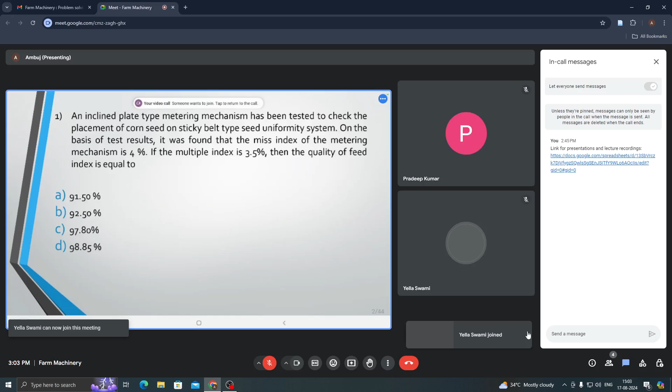Do try to solve this particular question. As you can see, miss index is given, multiple index is given. Now quality feed index is being asked here.

If you don't know the formula, I'll tell you. The quality feed index is equal to 100 minus, in bracket, metering miss index plus multiple index.

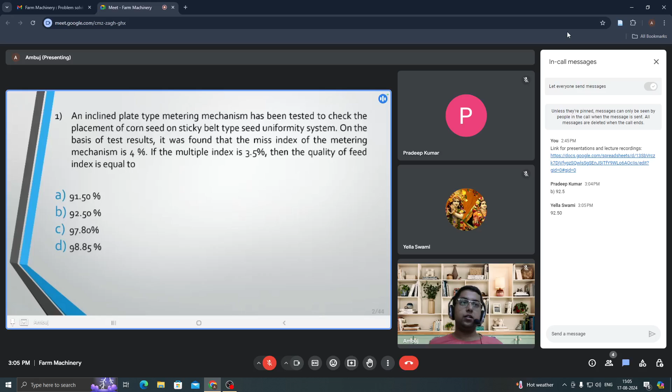Pradeep Kumar is saying 92.5. Great, okay, very good. Yella Swami, please you also try, I already told you the formula also. Try to solve this particular question, the formula is 100 minus, in bracket, miss index plus multiple index. Easy question, do try to solve, check what is the answer coming. Very good, both the students have just calculated. Very nice, the correct option is 92.5 only.

As you people have calculated, I'll brief you about the different indexes. First index is miss index. It is a measure of how often the seed metering mechanism fails to release a seed at a designated time or position. As the name suggests, it is miss index. Essentially, it indicates the percentage of planting instances where no seed is getting dropped from the metering mechanism, that is why the name has been given miss index.

Now how to interpret this miss index: lower the miss index, the more reliable the metering mechanism would be, because fewer gaps would be there in the seed placement. High miss index means high frequency of missing seeds, leading to uneven plant spacing. So this is the interpretation of the miss index.

Another index in this question was multiple index. As the name suggests, multiple index measures how often the seed metering mechanism releases more than one seed at the designated time or position. It represents the percentage of planting instances where multiple seeds are getting dropped in the same spot. That is our multiple index.

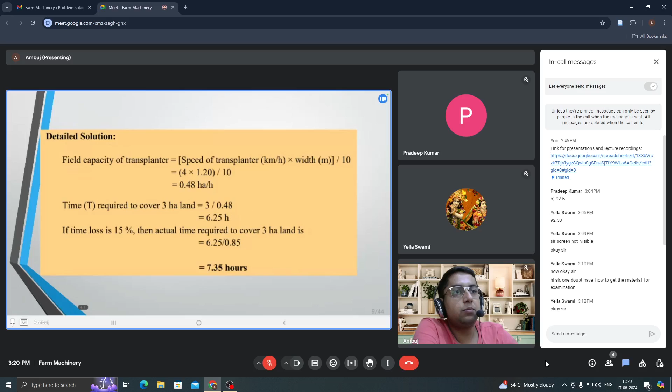Now the time loss is 15%. So either I divide by 1 minus the loss, that is 1 minus 0.15, which equals 0.85. Or another approach: I'll calculate effective field capacity as theoretical field capacity multiplied by 1 minus time loss. Either I multiply or divide by 0.85. Better you go with this approach, don't get confused between the two. From both you will get the same answer, but for the examination point of view, this approach is easier, which is why I've kept it here for you.

So calculating TFC, then calculating the time required to cover 3 hectare land with 15% time loss, divided by the efficiency, which is 1 minus the loss, that is 0.85, the answer would be 7.35. Is it clear?

Is it clear? Any doubts? Please do respond.

Sir, please repeat the solution once again. Okay, I'll just repeat.

In this question, an 8 row paddy transplanter is given. Speed is 4 km per hour, and the row to row spacing is given as 15 centimeters. So the formula for theoretical field capacity is S multiplied by W divided by 10.

So here, 4 multiplied by the total width, which is 8 into 15. S is in kilometers per hour, W is in meters, so here it would be the total width of the implement, that is 8 multiplied by 15, since 8 rows are there and 15 is the row to row spacing. Total it would be 8 into 15, which is 1.2 meters.

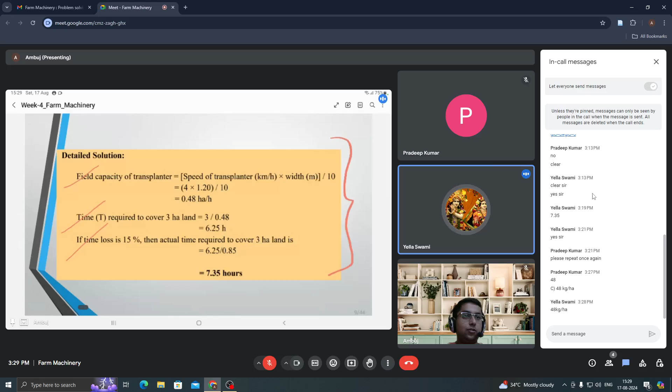Okay, I am sorry I was not able to see your comments. Very sorry, you both have answered the previous one, 48 kg per hectare. Very good, very good. Now I can see, my fault, I haven't seen your option. Yes, for previous question, Yella Swami says 7.35.

Very good, very nice. Pradeep has written, please repeat once again. Okay, I have repeated. Clear, sir. Very good, yes, both have answered 48 kg per hectare.

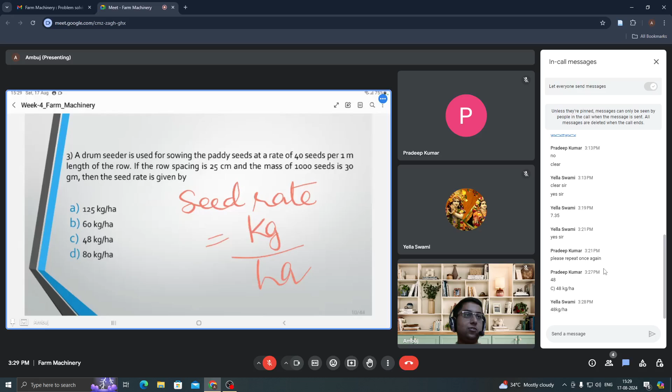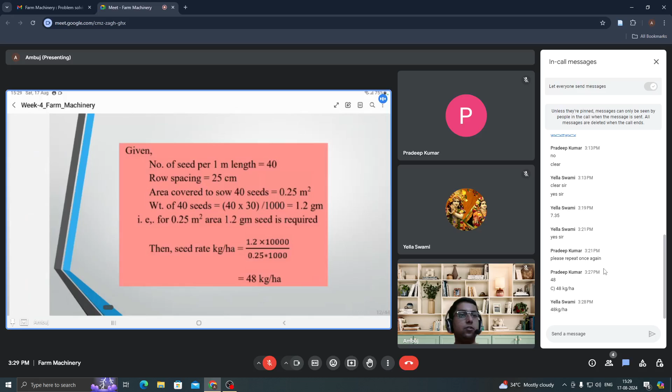No problem, yes, see here, the solution I have provided. Number of seeds per 1 meter length is 40.

Row spacing is 25 centimeters. Area covered to sow 40 seeds is 0.25 meter square.

What is the weight of 1000 seeds? Then from unitary method, I got the weight of 40 seeds, that is 1.2 gram. Very simple, 0.25 meter square area, 1.2 gram seed is required.

So what would be the seed rate? 1.2 divided by 1000, then 0.25 divided by 10,000, gives 48 kg per hectare. Both the students who have joined today have calculated it.

Very nice. I think you people are not having any doubts. I am assuming because both the people have answered. We'll move on forward.

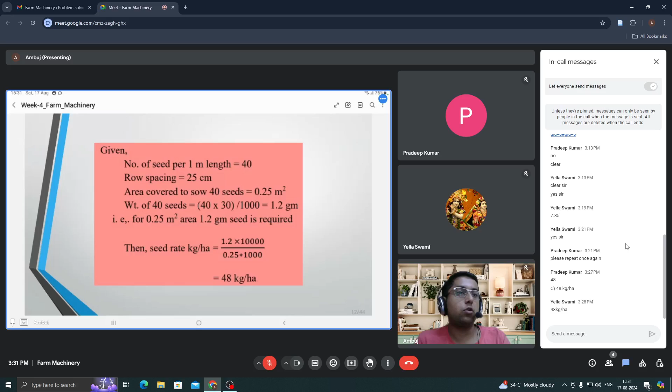This whole thing is given in the lectures. I can understand if you don't remember, please do just respond. There is no need to fear that you have to be correct in the very first attempt. Then I'll show the code to you also. Yes, try to respond.

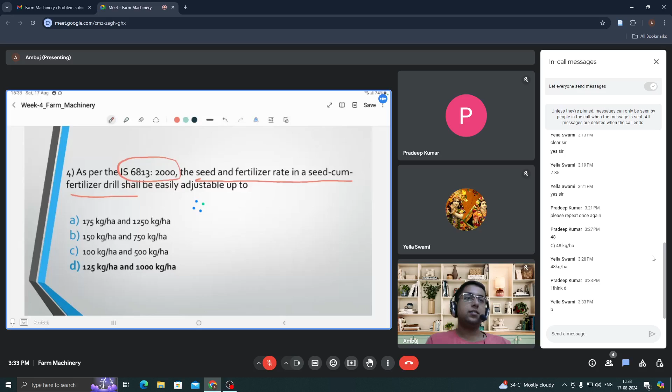IS 6813, 2000 deals with seed and fertilizer rate in a seed cum fertilizer drill. This particular code is related to the design of seed cum fertilizer drill only, yes this is the code.

Here I have shown the pictures, I'll zoom in, don't worry. After the class, in the PPT also it would be there. Please do see all the aspects which are there in this particular code. It is related to sowing equipment, seed cum fertilizer drill, and what are the specifications.

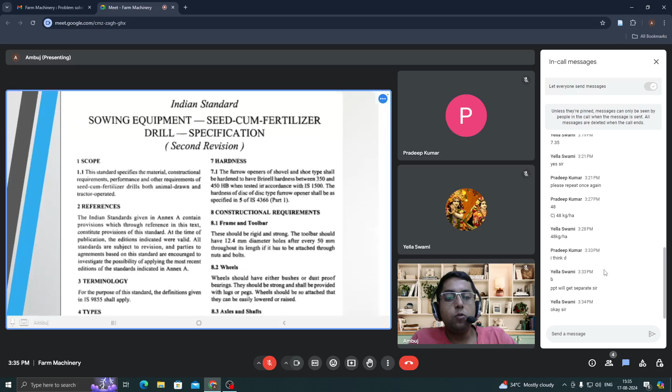Who will check whether the standards set by the government agencies are getting met or not? The testing agencies, various testing agencies are there. So for seed cum fertilizer drill, these specifications are there, let us see them. Scope is there, then references, Indian standards is there.

Then terminology they have given, what are different types: animal drawn, tractor operated, trail mounted. Then they have given the size also, what should be the size, how it should be mentioned. What are the different materials, for different parts what materials should be used.

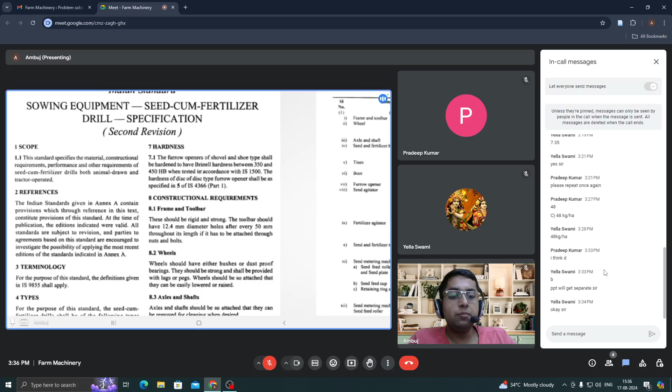It is not like the hopper can be made from plastic, it will wear out, so some standards are there that we have to follow. Hardness is there, what shall be the hardness, then frame and toolbar, how construction shall be made, then wheels, then axle shaft.

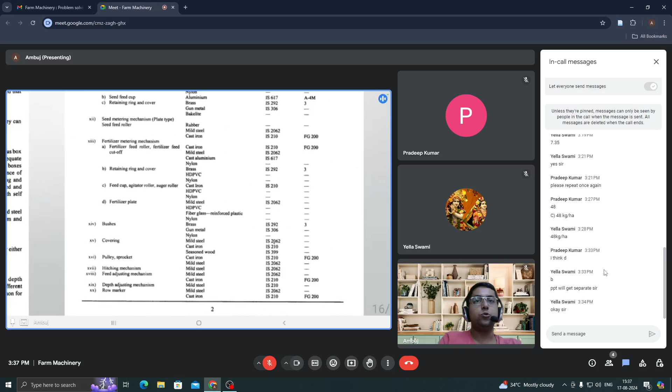Seed and fertilizer boxes, what should be the specifications? Whether I should go for mild steel or GI sheet depends on me. Tines are there - what should be their specification? For openers, this particular table mentions the materials for construction of different components. After the class, just have a look. Different materials for each component are provided, written here in code only. You have to go through that code. From there you'll get what shall be the material and what shall be the grade.

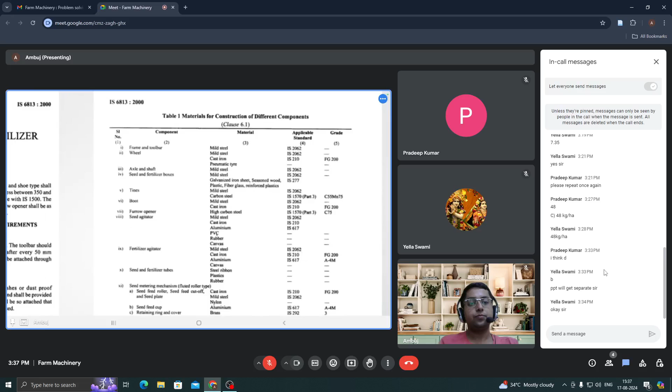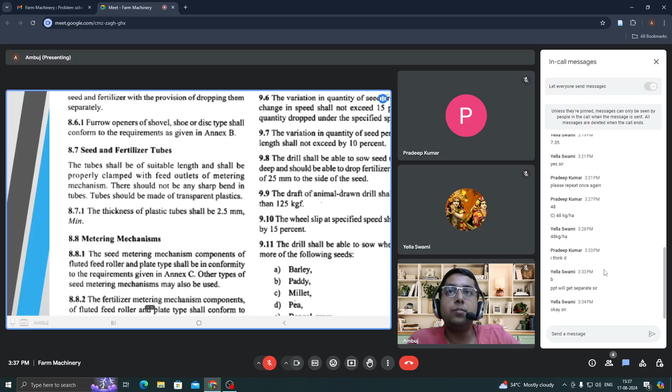Next, see here - furrow openers are there. Then seed and fertilizer tubes - what shall be the mechanism, what shall be the material, what shall be the specifications. Then metering mechanisms, then transmission system, then performance requirements. Seed and fertilizer rate shall be easily adjustable up to 125 kg and 1000 kg per hectare respectively - that was being asked in this particular question. So the entire code along with the detail I have mentioned here.

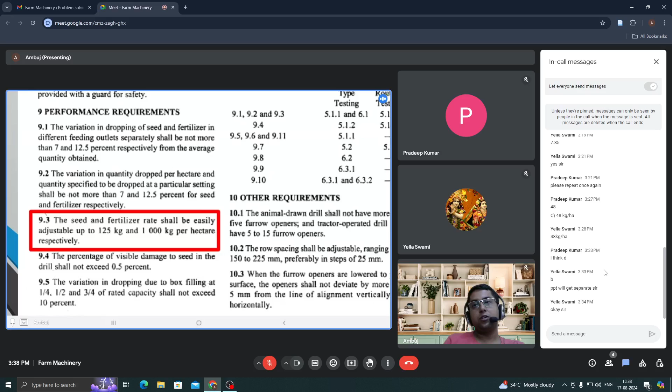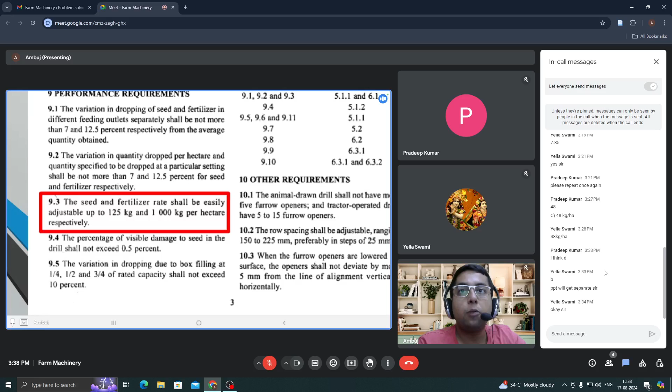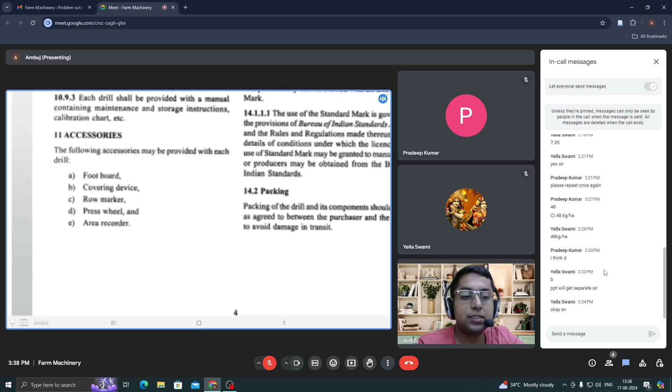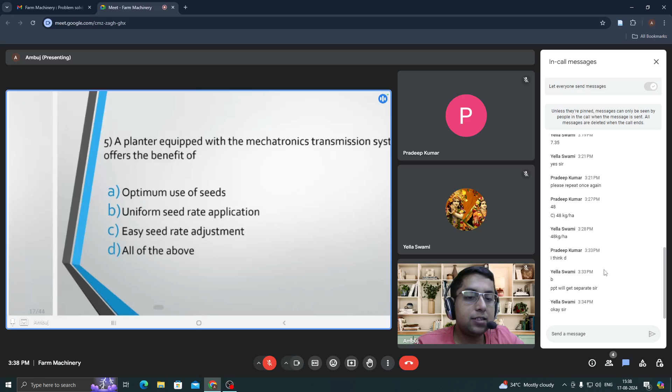Then percentage of visible seed damage - in the seed drill shall not exceed 0.5%. That's visible damage to the seed which I can see while my seed cum fertilizer drill is operating. Variation in dropping due to box filling shall not exceed 10% - that is being mentioned here. What shall be the weight, what shall be the material, what shall be the accessories - everything is mentioned here. Then workmanship and finish, then sampling and test, then marking and packing, then how to get that certification marking also - everything has been mentioned here. After the class, please revisit this entire code. I have mentioned it here - you'll get a lot more insights.

The correct option would be 125 kg per hectare to 1000 kg per hectare. Let me just save this for you.

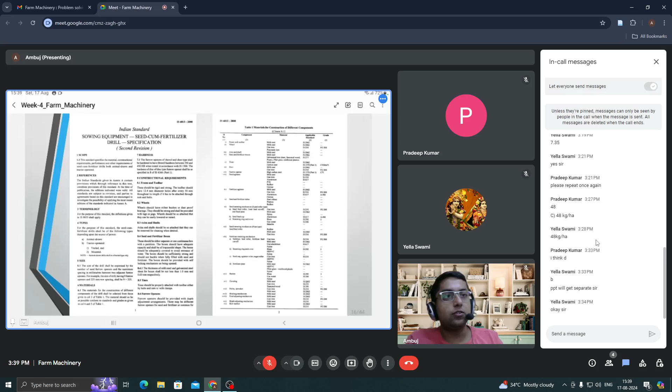Any doubts anywhere, anybody? Any doubts? Clear? Not clear? Shall I move forward, shall I stay? Yes, yes sir, yes. Okay, we shall move forward.

Clear? Good, very good. Now please try to solve this question. I know the first three numericals were quite tricky, but these type of questions you can very easily solve. You should always get 100 out of 100 in these questions, or 1 out of 1.

A planter equipped with a mechatronics system offers the benefit of optimum use of seeds, uniform seed rate application, easy seed rate adjustment, all of the above.

Pradeep is saying D. Very good. Yella Swami is also saying D, and you both are correct. I congratulate you for getting 1 out of 1 in this particular question. A planter equipped with a mechatronics system offers all these benefits: optimum use of seeds, uniform seed rate application, and easy seed rate adjustment.

Let us look at each of them one by one. Mechatronics system integrates mechatronics - I'll write it so your understanding becomes more fundamental. Mechatronics means mechanical plus electronics. The system would be having a mechanical component, an electronic component, as well as components of control engineering.

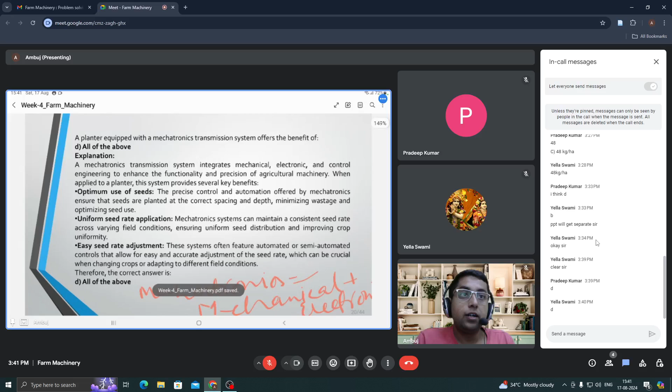This enhances the functionality and precision of agricultural machinery. I'll tell you this particular domain in great detail in the next few slides - just be with me, because this domain is getting important day by day. If you will be doing R&D research after graduation or post graduation, or going for higher studies, this domain is getting a lot of focus nowadays. So I'll tell you the components as well as how it is functioning in great detail. Be a bit more careful and attentive, and do ask me if you have any doubts.

This is very important for your future, whether you are getting into the agricultural machinery industry or pursuing higher studies - for both domains this concept is getting a lot of attention nowadays. So be with me, be attentive, just focus. All the components - mechanical, electronic, and control engineering - would be there in an agricultural machine.

And how will I get optimum use of seeds? Firstly, I'll get these particular benefits: the precise control and automation provided by the mechatronics component. Everything is getting automated. Here feedback is there, so the efficiency of the system is getting enhanced.

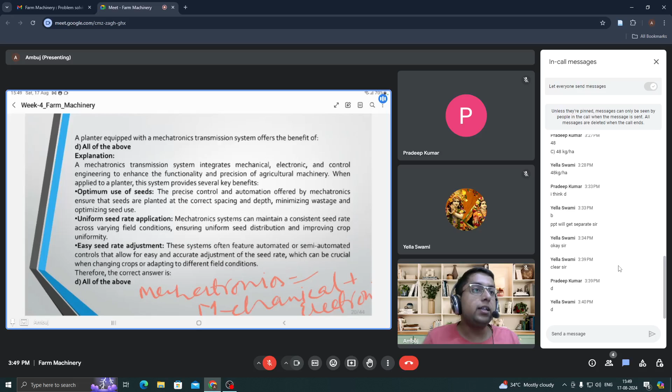In between, I'll just move forward. At the end of these slides, 2-3 slides later, I'll tell you the disadvantages also. If you can think of any, you can just comment. Yes, we shall move forward.

In this way only, you have to design a mechatronic system. First, you formulate what components are required. Then in the second phase, you try to model the velocities, the currents, the angular velocities which are happening, and how these components interact with each other in a closed loop. Important thing is everything should be closed loop. If it is not closed loop, then there is no particular benefit I can achieve by incorporating these sensors as well as these microcontrollers in my system. Everything should be in a closed loop, feedback should be there.

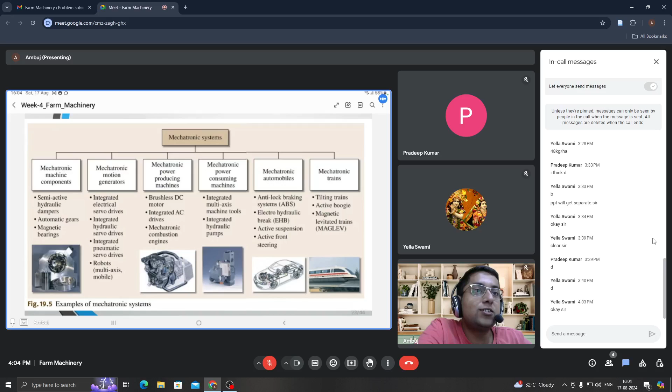Which of the following instrument is used for measuring rotational speed of the shaft? Please do tell me: tachometer, potentiometer, spirometer, hydrometer. Do comment. A - very good, very nice.

Instrument which is used for measuring the rotational speed of a shaft - tachometer. From Yella Swami, from Pradeep, what is the answer? Is it potentiometer, spirometer, hydrometer, or tachometer? Tachometer - good, very good, yes.

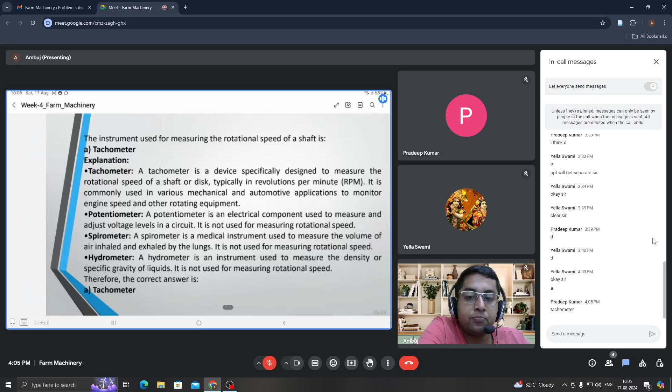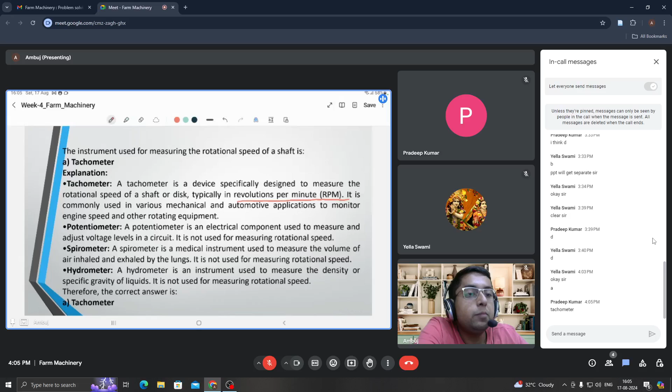The instrument used for measuring rotational speed of a shaft is tachometer only. It is specifically designed to measure the rotational speed of a shaft or a disc, typically in RPM - revolutions per minute. It is commonly used in various mechanical and automotive applications to monitor engine speed and other rotating equipment.

Another option was potentiometer. Potentiometer is an electrical component used to measure and adjust the voltage levels in a circuit. Its working principle is the voltage divider circuit. It is not used for measuring rotational speed because tachometer is used for that, as we have already seen.

Spirometer is related to the medical field. It is used to measure the volume of air inhaled and exhaled by the lungs.

It has nothing to do with our mechanical systems. It is used for measurement of the volume of air inhaled and exhaled by the lungs.

That's good for your ergonomics course. Yes, it is not used for measuring rotational speed.

Then there is the hydrometer. A hydrometer is an instrument used to measure the density or specific gravity of liquids. It is not used for measuring rotational speed. Hence, the correct answer is tachometer.

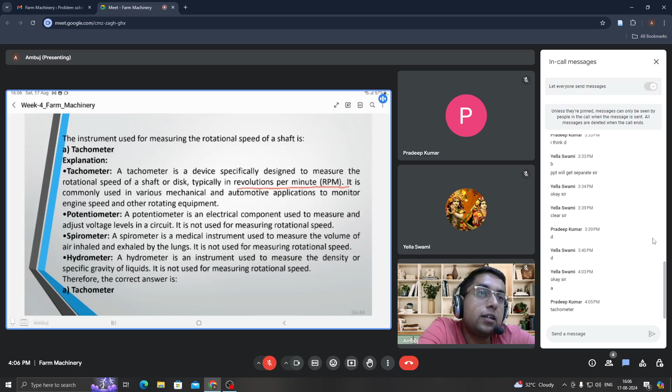Contact type or non-contact type? Please do tell me, what is your preference?

Non-contact type, very good. Pradeep, which one will you like to use? Contact type or non-contact type? Very good, both of you will be going for the non-contact type tachometer.

Okay, why? Because you don't want to have contact with a rotational shaft, you might get hurt, or something like that, or any other reason.

Yes, for safety purposes. Okay, actually you can say it, no problem.

But the real reason is accuracy. In case of a contact type tachometer, an asynchronous motor is fixed. When AC current is provided to your fan, what happens?

Your fan motor rotates, it blows air, and you feel cold.

In case of an asynchronous motor, what happens? When you rotate that particular motor, electricity is generated. So that electricity generation mechanism has to be calibrated with RPM.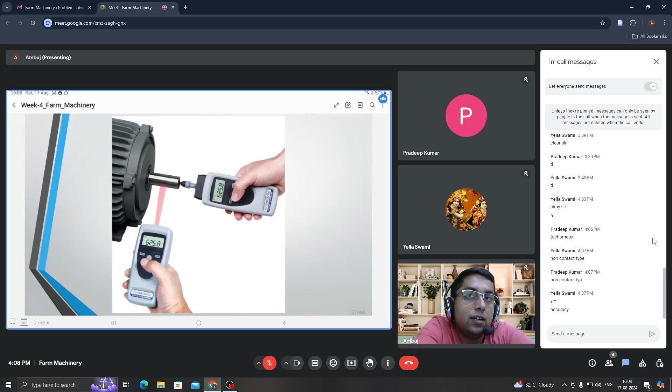In the second figure, I will write it down for those who are not attending the class, so they can also benefit.

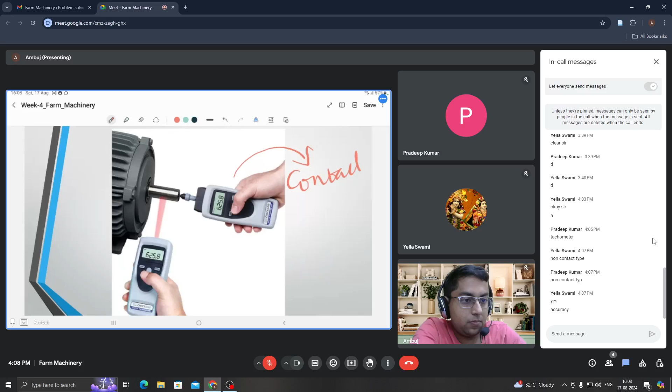This is the contact type tachometer, and this one is the non-contact type.

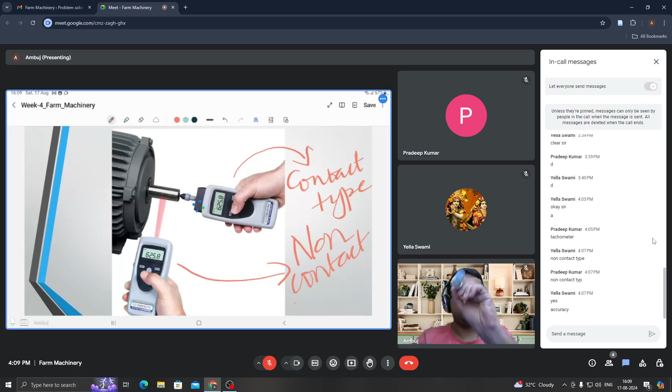Okay, good. Yes, for non-contact type, can you see this? What thing am I showing with my hand? Do you know what is the name?

Yes. What is this called? This is somewhat like a sensor.

It is having 3 wires. Do you have any guesses? Guesses can also work sometimes. Something synchronous type? No, not something synchronous type.

That I told you already, it is related to the contact type tachometer, I mean the non-contact type tachometer. Any guesses? Even if you would have said non-contact type tachometer, it would be correct. This is known as a proximity sensor.

You will be using this in your BTech projects, or even your master's, PhD, any level. It is very important, that is why I am showing you this particular sensor. It is an industrial grade proximity sensor, having three wires.

Two wires are for plus and minus, DC current you have to supply, anything between 5 to 12 volts. Two wires for plus and minus, and one is for signal.

Have you seen it? I'll just keep it aside, then I'll tell you how it works.

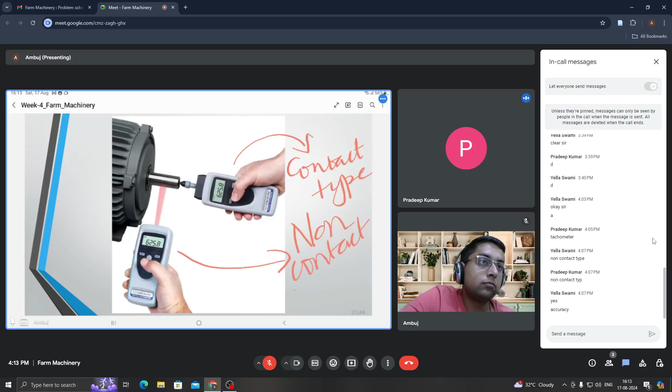Yes sir, okay very good. This was regarding the tachometer.

Let's move to the next question. Which of the following is not a method of implementing site-specific information to the VFRA, variable fertilizer rate application system? Yes, you are saying B, formula-based approach. Another option was sensor-based, then map-based approach. Yes, you are very correct. The correct option is formula-based approach.

Let us look at this question. The method that is not typically implemented with a site-specific VFRA, variable rate fertilizer application system, is the formula-based approach. If we go with a formula-based approach, how will we be able to vary the fertilizer rate application? It does not make sense, that is why this option is incorrect. The other options, sensor-based approach and map-based approach, are valid approaches for the VFRA system.

Brief information is here, more detailed information is in the next few slides. Sensor-based approach: this method uses real-time sensors to detect soil properties, crop conditions, and other relevant parameters directly in the field. The data collected is used to make a particular map, which has to be geotagged. There is a keyword, geotagging, that technology is used. From that map, I'll be able to vary the rate of fertilizer application. First sensing has to happen, then mapping has to happen, and these two have to be integrated for variable fertilizer rate application.

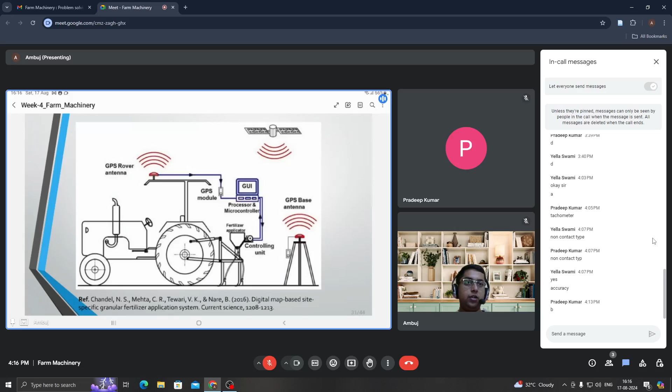Much greater detail is shown in this figure, try to understand. Here you can see a tractor, then a variable fertilizer rate applicator, a controlling unit, then a GUI, which is a graphic user interface. It is a particular software which gives all the outputs as well as takes the necessary inputs from the user, then GPS module is there.

So in this map-based approach, the entire field would be mapped. Before the mapping, soil conditioning or soil sampling happens first. Proper soil sampling at different places is done, so you can have a map with GPS coordinates and the relevant fertilizer quantity along with it. So as soon as the tractor approaches that particular point, the GPS coordinates would be matching.

I have already calculated and fed into the system what fertilizer quantity is needed at particular GPS coordinates. For example, at 0,0, 10 kg per hectare would be the rate. At 0,1, 20 kg per hectare would be the rate. Similarly, at 0,2, 15 kg per hectare would be the rate.

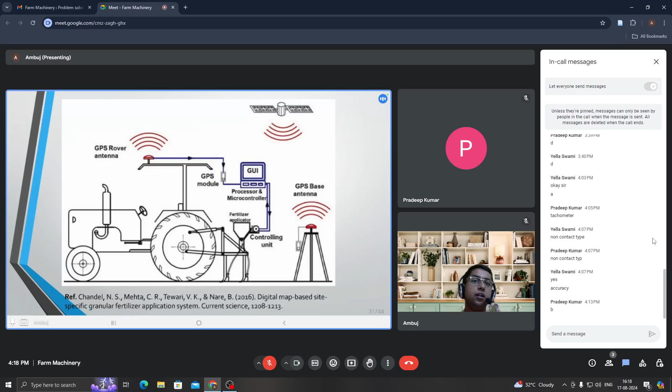This means it will not be seeing things like we see. Our eyes are an example of RGB camera. The μEye color camera will have various spectrums, so it will be able to see things in much greater detail than our eyes, which can only see RGB. If a plant is dying, we will only notice if our eyes can see it, then we give water. That is the limited perception of an RGB camera. Eyes are an example of RGB camera only.

But with a hyperspectral camera, you can see a lot of bands. From those particular bands, you would be able to tell beforehand, through symptoms 2, 3, or 4 days in advance, whether my plant has nitrogen deficiency, potassium deficiency, or any other deficiency, as well as if it's dying from lack of water or micronutrient deficiency. Whatever problem is there with my crop, you can see it with this camera because various bands are captured.

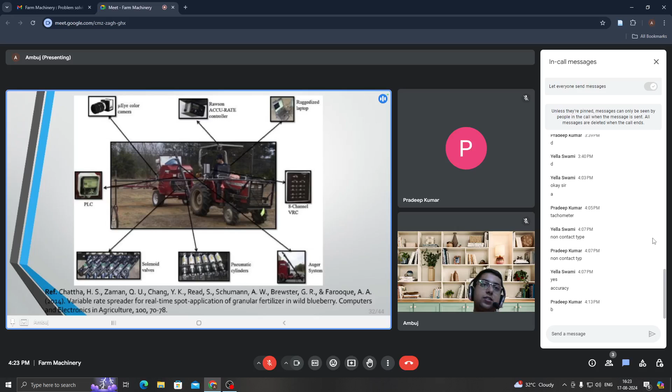Then the auger system is there, with pneumatic cylinders and solenoid valves. If you vary the pressure in the pneumatic cylinder, the opening of the solenoid valve will change, and that will change the amount of fertilizer getting applied in the field. So this was regarding both approaches in this question: the sensor based approach as well as the map based approach.

Clear? Or if any doubts are there, please do ask me. Already explained. Yes, sir. Yes. Okay, very good.

Let us move forward. Very easy question, please do attempt it. The percentage of seed spacing that is less than or equal to half of the set plant distance is known as: multiple index, quality feed index, miss index, or performance index. Please do tell me what do you think.

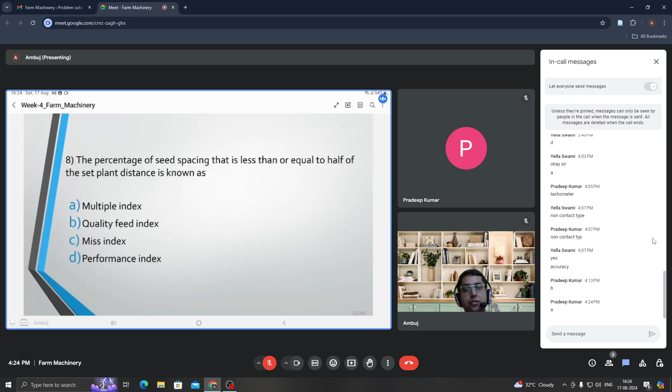Percentage of seed spacing that is less than or equal to half of the set plant distance - what is the name for it? Yes, very nice, very good, it is multiple index. Percentage of seed spacing that is less than or equal to half of the set plant distance is multiple index.

Quality feed index I already explained you, miss index I already explained you. Performance index refers to a more general term that refers to various measures of the seed mechanism's effectiveness, but is not specifically defined in this particular context. Performance index is a general term, not specifically related to our metering mechanism.

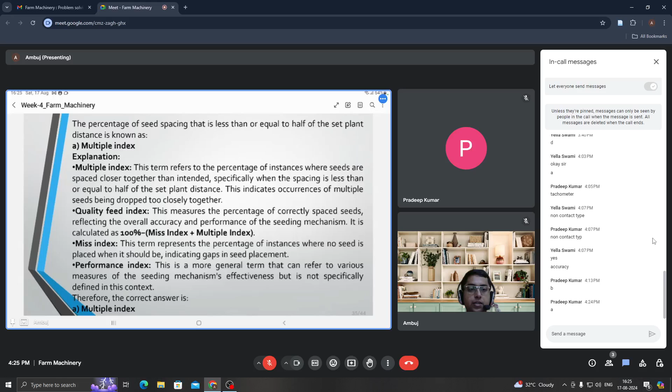Yes, let's move forward. As per the BIS standards, the soil sample taken for measurement of puddling index has to be kept undisturbed for a minimum period of - see here, the important keyword is minimum. Do attempt it.

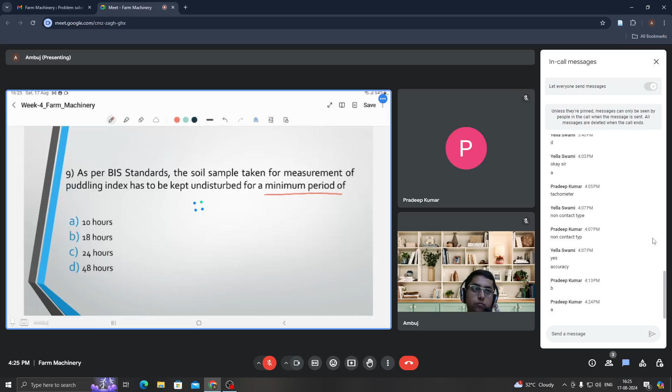According to you, what shall be the minimum period for which the soil sample has to be kept? A or B, but you are not confirmed. No problem. According to the BIS standards, it is 18 hours.

I'll tell you the term as well as the explanation in great detail. Puddling index measures the degree of puddling of the soil, often done in rice cultivation to create a suitable seed bed - the degree of puddling or the breakage of the soil clods into finer particles. This index measures how many clods are getting broken, so an undisturbed period is required.

For that particular period you have to leave that soil sample. How I'll collect a soil sample, I'll tell you in a few more slides. After collecting a soil sample for puddling index measurement, it is necessary to allow the sample to settle or stabilize. This settling period ensures that any water in the sample reaches equilibrium and the soil particles have sufficient time to settle.

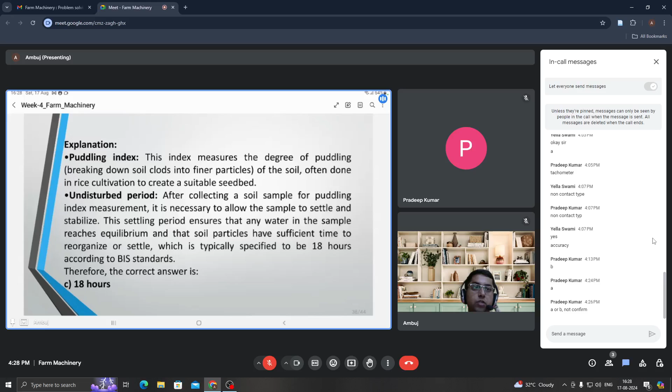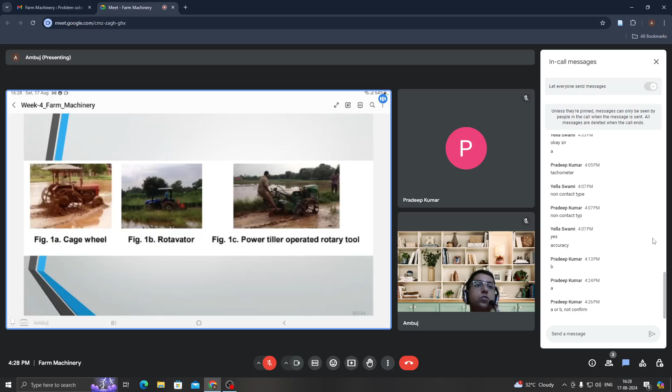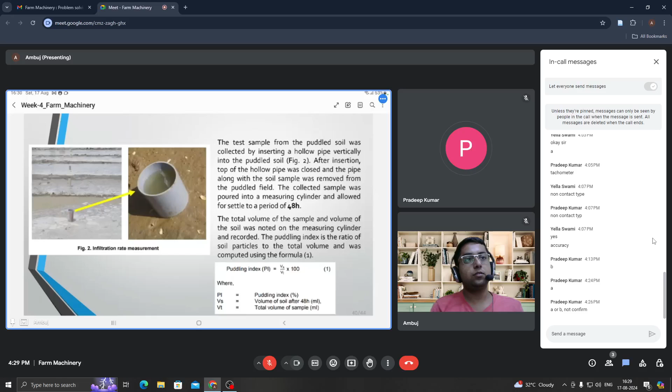Is it clear? Information regarding puddling, any doubts? Then please do ask me. No doubt, clear sir. Very good, very good.

Next question: which type of mechanism is used in moving finger type self-propelled paddy transplanter? Is it rack and pinion? Is it slider crank? Is it cam and follower? Is it crank and rocker mechanism of 4-bar linkage? Any idea? Anything?

Very nice, very good. You are absolutely correct. It is crank and rocker mechanism of 4-bar linkage, the mechanism of moving finger type self-propelled paddy transplanter.

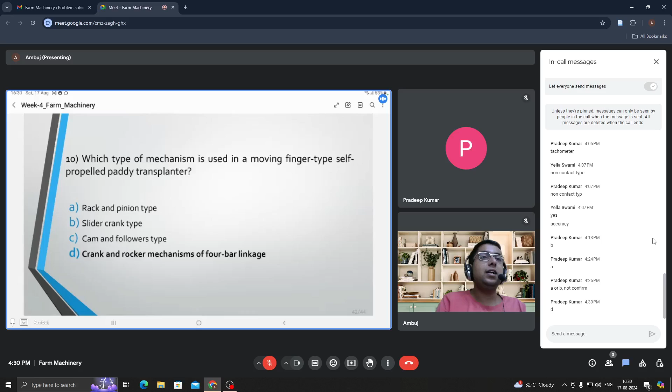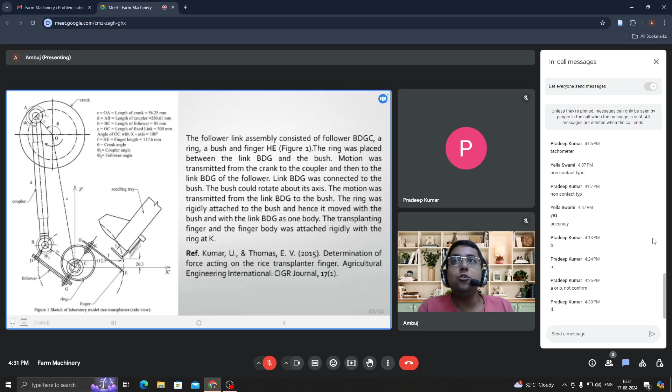This is the detailed diagram, I'll zoom in for you. I think it is clearly visible. This particular mechanism is there, and you can do the kinematic analysis of it also. Don't get scared from the diagram, it looks a bit clumsy, but it is very easy to understand. I'll explain in great detail.

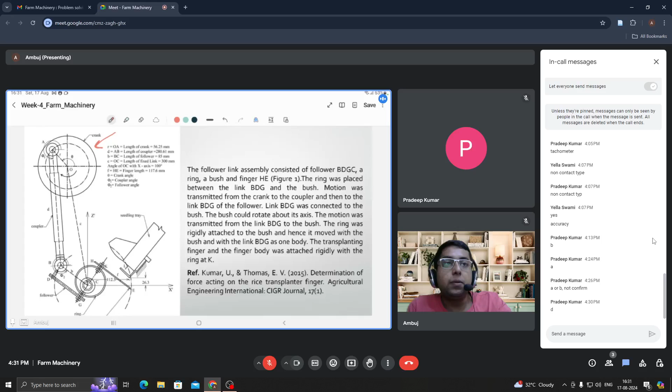Just be with me. Yes, here you see the crank is there. With the help of the pointer I'll show you. Rotational motion happens at the crank, then that is connected at point A through a coupler. Then the coupler is connected to a follower.

That follower is connected to another ring, and that ring is connected to this particular finger. HE is my finger, here it is also written. I'll also write, HE is ultimately my finger.

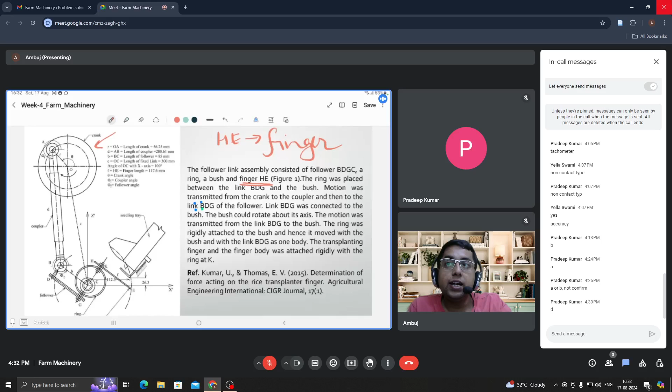So what is happening here: when I rotate my crank, through the coupler the motion gets transmitted to my follower. Rotational motion is happening at the crank at joint A as well as at joint B, but this follower will also try to rotate that particular ring, and that ring will ultimately pass the rotational motion to my finger. Any query?

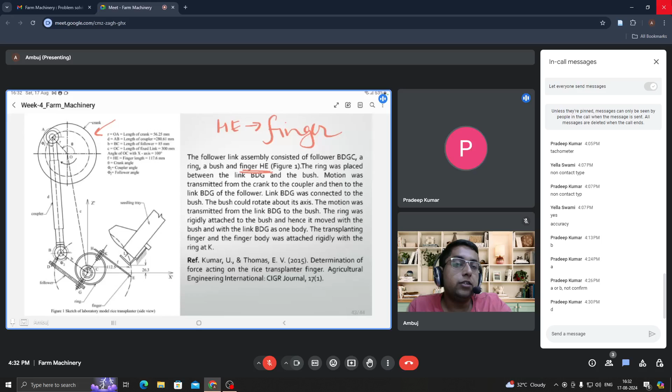You just raised your hand. Can you zoom the diagram? Yes, I can zoom it, no problem. Can you see it now?

Okay, I'll tell you from the starting. The crank is rotating, so rotational motion through joint A will get transmitted to my coupler. From the coupler, the same rotational motion will get transmitted at my BD attachment, that will further guide my follower. All the motion is rotational here only.

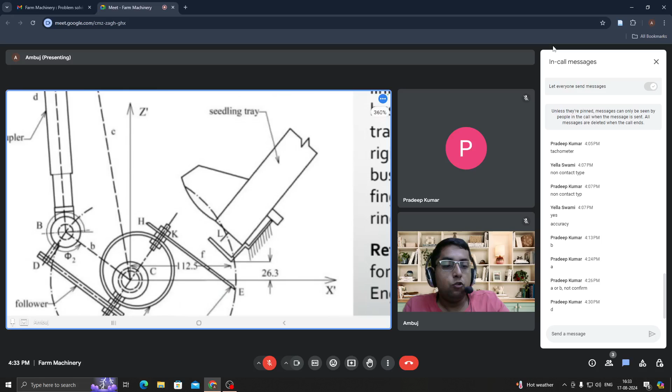So ultimately the motion will get transmitted to my follower through my ring, and will get transmitted to my finger through my ring. And what will happen? A seedling tray is there, from this seedling tray the seedling will be plucked by my finger, and they would be sown in my puddled soil.

At the crank, rotational motion is happening. At joint A, it is getting transmitted to my coupler. From the coupler, that is ultimately transmitted to my follower, and that follower will guide my finger in rotational direction.

What is happening here, just visualize this particular motion. This is my finger, so it will just pluck and sow just like this. Visualize it through the motion of my hand. This particular motion will happen in case of my seedling tray mechanism, this particular motion is for my finger.

Not my hand finger, but the fingers of the paddy transplanter. I see this particular motion in this direction, it will pluck the seedling from my seedling tray and sow it in the soil. This was regarding the crank and rocker mechanism of 4-bar linkage.

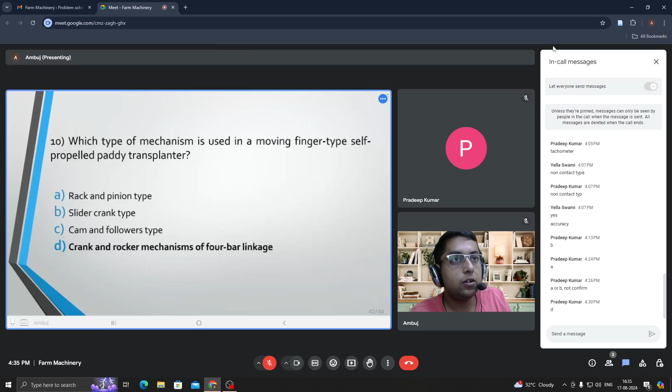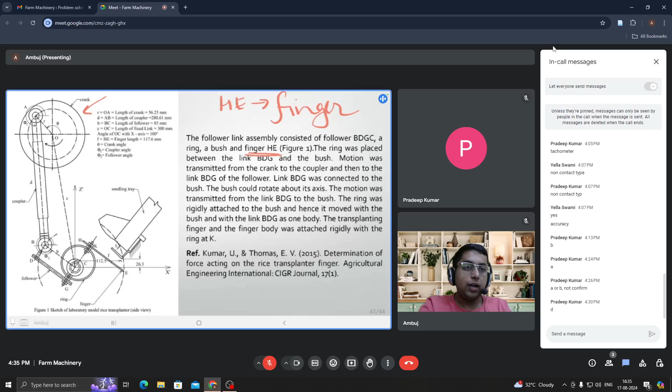Any doubts? Okay, that is all from my side. Just a quick clarification, few seconds. Just one second. Yes, a quick clarification.

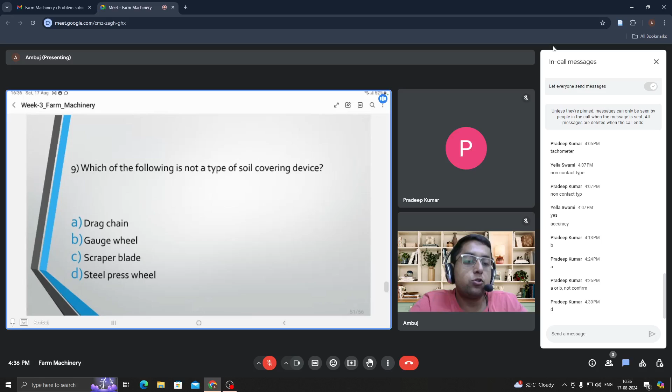Regarding my previous session, this was the question: which of the following is not a type of soil covering device? Apologies from my side, I told correct option is scraper blade, but the correct option is gauge wheel. Please do remember it.

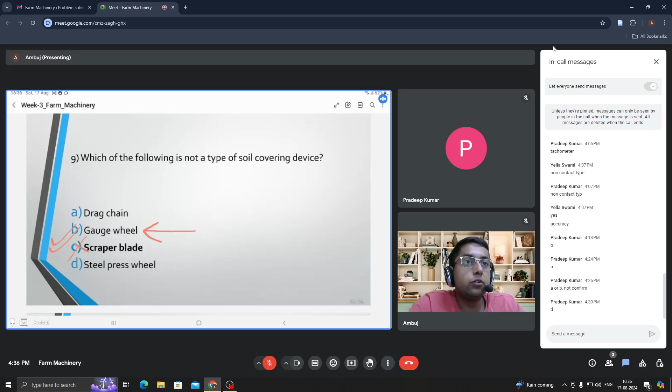Apologies from my side, there was confusion regarding option B and C. Correct option is gauge wheel only, gauge wheel is not a soil covering device. Rest all the options given - drag chain, scraper blade, steel press wheel - these all are soil covering devices.

Great explanation I have mentioned here. There was some confusion in the previous session, apologies from my side for it. Correct option is gauge wheel only, just this information. Now coming back to our session.